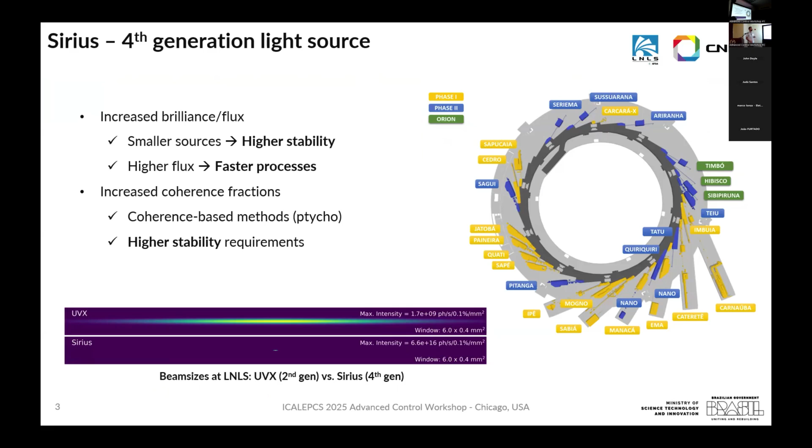So we need not only to provide a better beam, but also better beamline components. So we needed to improve the techniques we use to exploit all the possibilities that a fourth generation light source would enable. So we need to come up with high performance mechatronics. And this is a body of knowledge that has been constructed for almost 10 years by the community along with some partners. They are here in this event as well.

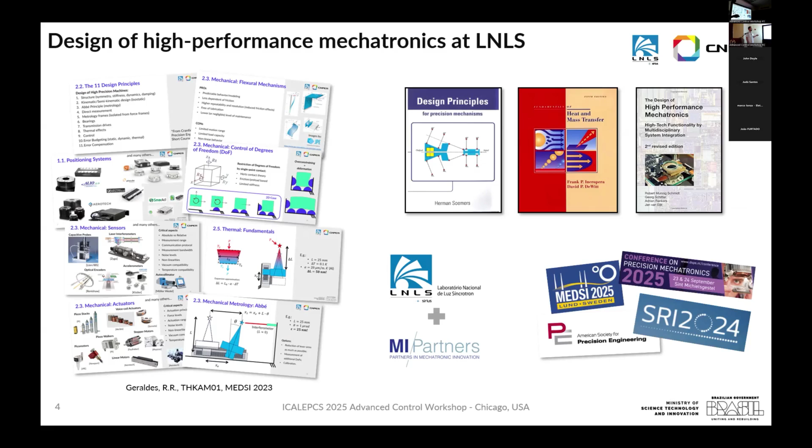And this is a very multidisciplinary task. It involves mechanical, electronics, thermal, and also control. And I'm here presenting only the control part. So we came up with a kind of workflow for designing the controllers. It starts already in the mechatronic design itself, which already takes into consideration making life easier for the control side.

So after we have a prototype, a proof of concept, or actually the final system, we do system identification to check the frequency response, to see if it matches the model, if it has any unmodeled aspects, strange resonances, if there's bad assembly that shows some artifacts in the frequency response. If we see this kind of stuff, we come back to the mechatronic design or even the assembly of the system.

If not, we go to design controllers, we implement them digitally, test the performance, and we test if the specifications are met. If not, we try to improve the controller, try different techniques, different tunings. And if it's not possible, we have to come back to the design. So it's basically a workflow to design the digital controllers for these mechatronic systems.

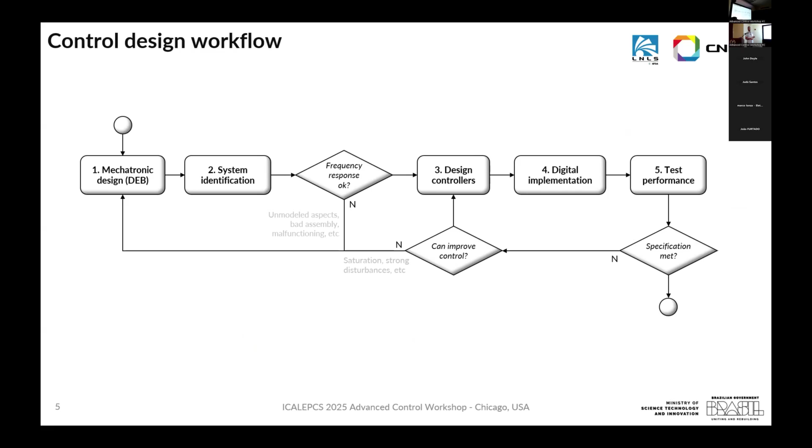And the first step, the mechatronic design, as I said, is a very multidisciplinary part. It involves establishing specifications, modeling disturbances, and trying to design the system considering everything together. We use lumped mass models and finite element methods to come up with the best model we can. And we use these models together with the models of the disturbances, vibrations, electronics noise, cryo-cooler vibrations, and we put everything together with a fixed control loop structure, which we try to optimize.

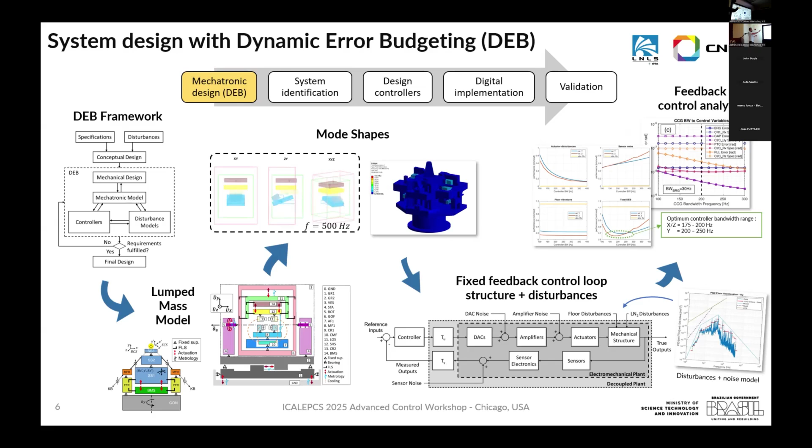Nowadays, we optimize mostly the bandwidth of the controller to see which would be the optimal bandwidth based on this modeling. Of course, we can't just extend the bandwidth forever because we have limited actuators and we would amplify noise. But this is the first step. We already take controls into consideration there.

So after we have a physical system, we do system identification. For this type of system, we are using a multisine excitation input. So a bunch of sinusoidal signals summed up, and we control the phase of each component with Schroeder phasing. It's a technique that reduces the crest factor of the signal, which is basically the ratio of the peak of the signal to the RMS. This is a way to minimize excitation of non-linearities and internal modes of the system; we want to come up with a very linear model here.

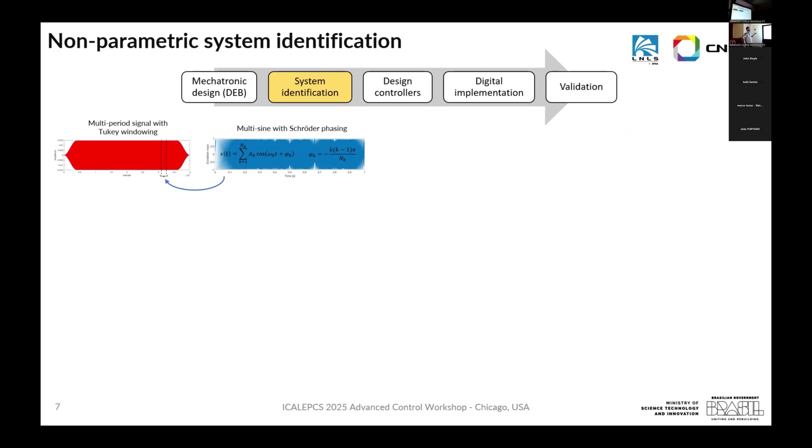Okay, so we take several periods of this multisine signal. We do a windowing at the start and at the end to, again, smooth the response of the system, trying to excite the less energetic modes and non-linearities as little as possible. And we implement this in a CompactRIO platform, which is the same one where we will implement the controller later.

We apply this excitation signal in each input, acquire all outputs simultaneously to get a MIMO frequency response. So we have a frequency response relating all inputs with all outputs. We do that for many operation points to check how the dynamics vary. For example, we see that for cryogenic and non-cryogenic operation of the system, these resonances move a little bit due to thermal expansion and such.

We also estimate the relative gain array, so we can be sure what the degree of decoupling is between these degrees of freedom. For this system, for example, we see a good decoupling up to 400 Hertz, which gives us confidence to go to a loop-at-a-time design, a decentralized control.

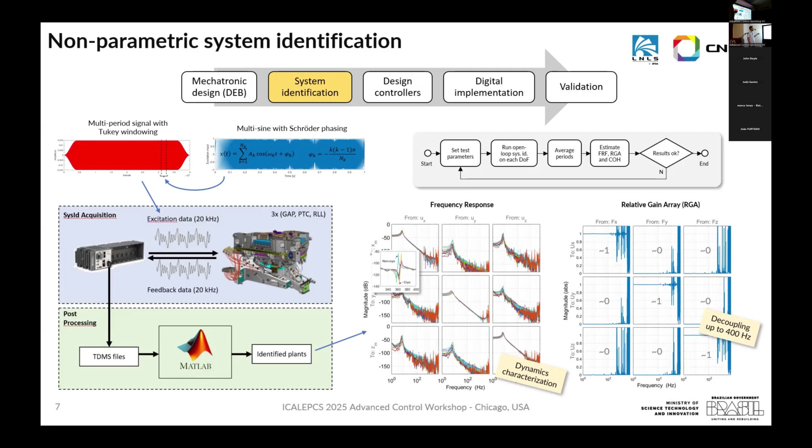And again, we validate this by iterating the test parameters here from the multisine excitation input. So okay, given a decoupled design, decoupled response, we are confident to work with a decentralized control. So nowadays we are working only with this, with SISO design. So when we do this system identification, we are already taking into account decoupling matrices. So we use decoupling matrices from sensors and actuators.

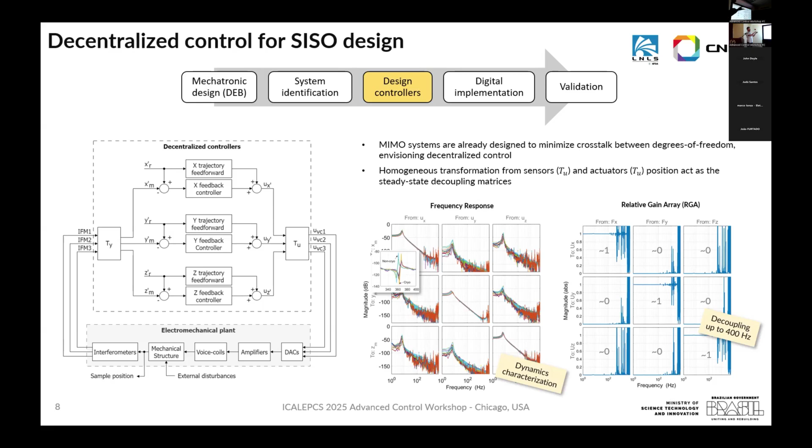They are basically homogeneous transformations from the position of the sensors and the actuators coordinate systems to the coordinate systems of interest, for example, X, Y, and Z. We want to control that. So we already have the decoupled design. And with this, we move on to design the SISO controllers.

So, well, we start with the loop gain definition, which is the transfer function of the combined controller, the plant, and the sensor dynamics. So it includes the phase of that. So we have this loop transfer function. From it, we can define also the closed loop transfer functions relating all inputs, the disturbances, the noises, the reference, to the signals of interest, which are the outputs, the error signal, the control effort.

And when we come up with all of this, we see that there are some trade-offs in the design. This is very classical for a control problem. So if you try to make the output track the reference well, you will not reject very well the noise. So we have a compromise there, and the solution is just to deal and to live with it by setting high gain at low frequencies and low gain at high frequencies.

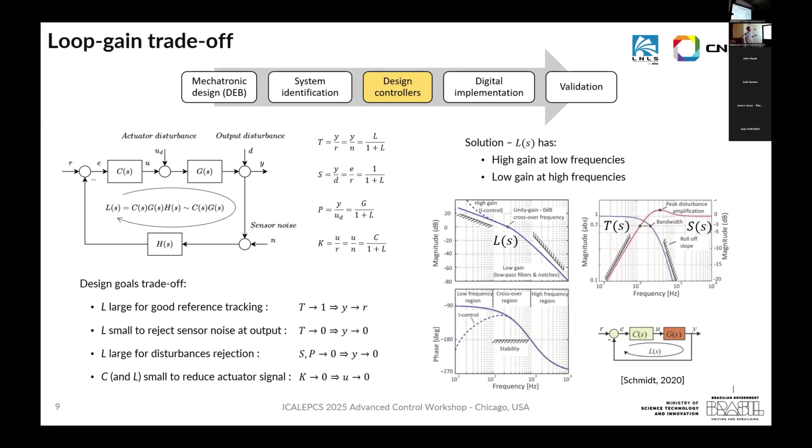So the transition of these two parts is where the loop gain crosses the unity gain, which we'll define here as the bandwidth of the system. And this is a very classical setup. And now what we want to do is to make the loop gain have the shape that we want. So we use the loop shaping method. For these systems, we have been using a fixed PID-like structure.

So it is composed by a proportional gain, one or two integrators, a lead compensator for phase margin, and some filters, so a low-pass filter to attenuate measurement noise, and also some high-frequency dynamics that are very outside of the bandwidth of interest, and some notch filters to deal with resonances that are bad for the margins.

And we also like to separate them in these second order blocks, so that when we discretize them, we provide a much higher numerical stability than if you discretize the entire transfer function at once. So we set some design specifications for the bandwidth. It comes generally from the first step during the design of the mechatronics that optimizes the bandwidth that we want to reach. It has been between 100 and 300 Hertz.

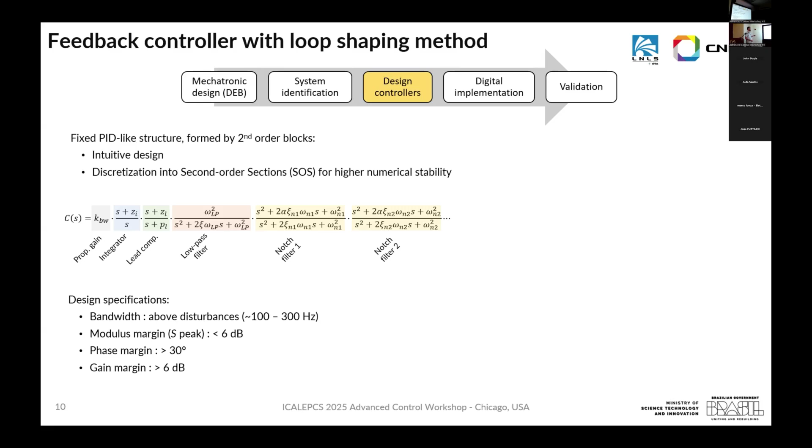We set a modulus margin of maximum 6 dB. The modulus margin is basically the peak of the sensitivity function, or how far you are from the critical point in the Nyquist plot. So this is a more convenient way to define robustness than gain margin and phase margin. It's kind of a combined margin there.

And to do this tuning, the loop shape tuning, we are doing it currently manually using a MATLAB tool called ShapeIt. It was developed by the Eindhoven University of Technology and some researchers there. And it's pretty similar to SISOTool, Control System Designer from MATLAB, but we like it a lot because it's very fast and it has a great advantage that it already exports the controller in these separate blocks. So I really recommend it. It's a free tool available online.

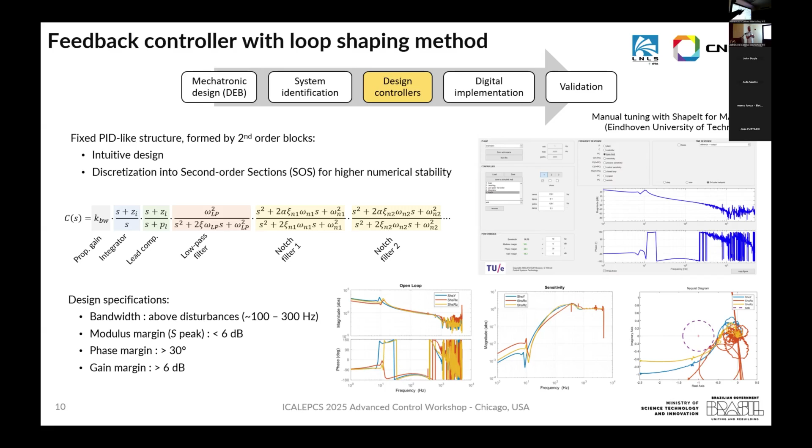And when we do this manual shaping, we are looking at the different transfer functions. So the open loop, the sensitivity, and the Nyquist plots, we can move between them with the selectors. And okay, so this is what we are doing now. We are envisioning using more advanced techniques like H infinity, H2. I know there's a talk about it, so it will be interesting to see later.

Okay, so feedback control can't do everything. So some systems need to follow a trajectory. And if you want to follow a trajectory very well, we would need to open the bandwidth of the controller too much, but this causes problems for the measurement noise. So we do a reference feedforward.

And when you do a reference feedforward, here you have it simplified. We have this closed loop transfer function, in which we see that if you approximate FG to 1, this transfer function goes to 1, and the output matches the reference, which is what we want. So to do this, we can use the model inversion technique.

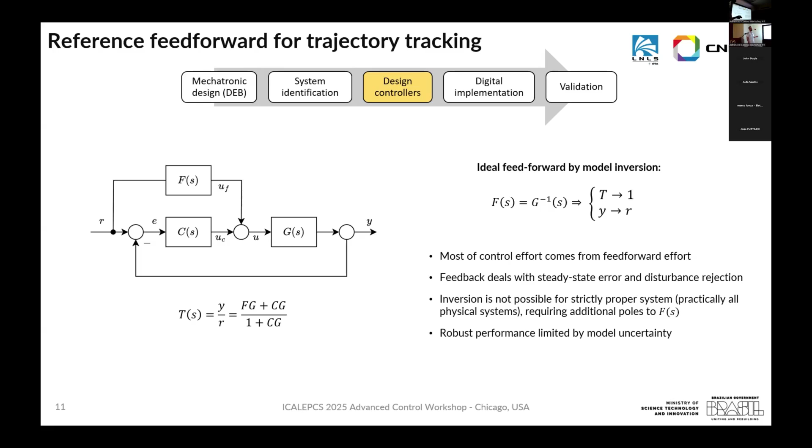So you just say that f is equal to the inverse of g. And of course, this is not practically possible, because if you invert the dynamics of a physical system, you have a non-causal system there. So it's never possible to do this inversion, but you can use it in smart ways to have some results.

So for example, for motions that require S-curves, so polynomial curves, we just provide all the derivative terms of the trajectory. We multiply them with gains. And we already provide a non-causal transfer function for this feed forward. For this, we need a parametric model. We usually fit a second order model with our data, and we can come up with Kp, Kv, and Ka related to the position, velocity, and acceleration terms.

Another technique we are exploring now is for periodic references. So we actually take the identified plant, invert the data we have to mount a lookup table. We embed this in the controller. And when we have these periodic references, for example, this almost square wave signal here, composed by many harmonics, we just provide the information about these harmonics, amplitude, frequency, and phase, for the trajectory generator and for the feed forward.

The feed forward will apply a gain and a phase for each of these components to generate a feed forward effort. It has worked well when the dynamics doesn't change much. So we have a work in progress to make an online estimation of this gain phase response as well.

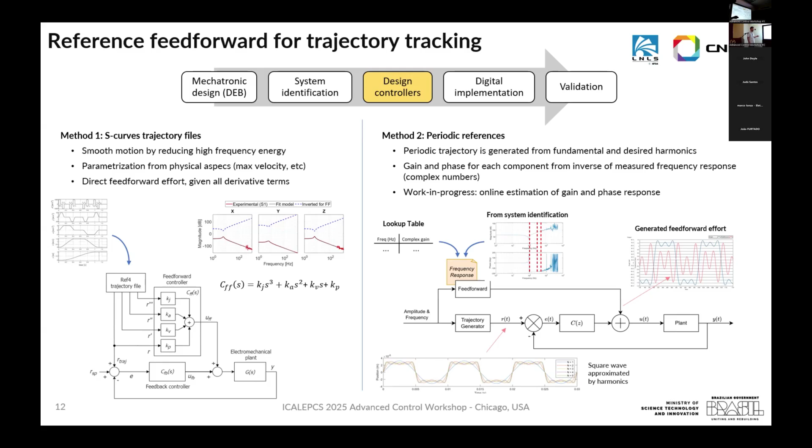And the digital implementation: after we have come up with these controllers, we implement them in a CompactRIO platform, which has a CPU and an FPGA core. Of course, the FPGA is dedicated for the control loop. The CPU is more for high-level stuff like file handling, EPICS, and stuff. And the implementation here has been at 20 kilohertz sample frequency. We discretize each block of the PID controller separately to improve numerical stability. Using Tustin discretization, we always use pre-warping so that, for example, the center frequency of the notch filters doesn't move.

The implementation in the FPGA is done in double precision floating point, 64 bits, so it makes the life of the developer easier, so we don't have to worry too much about the ranges of the fixed point implementation. And we need double precision for the dynamic range. So for example, we have stages that move millimeters with a precision of nanometers. So we need that kind of resolution.

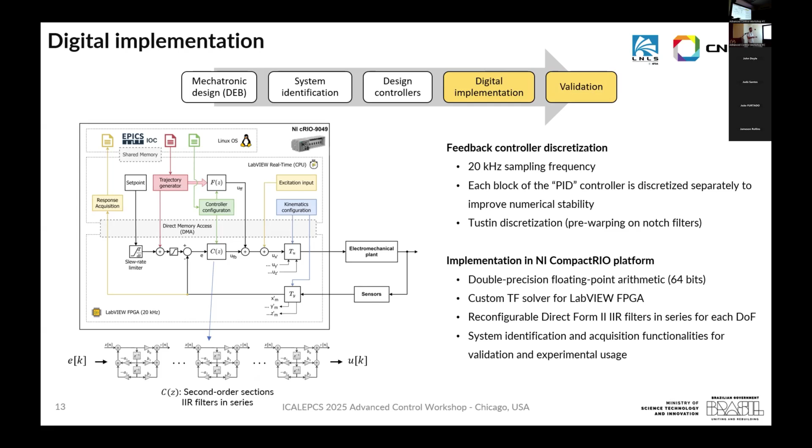We have a custom transfer function solver developed. We have a work we'll present tomorrow here about it, which consists of a reconfigurable chain of infinite impulse response filters in series that we can reconfigure online, and have a lot of these chains, so we can control many degrees of freedom. Everything is done in LabVIEW. We program this in LabVIEW. And of course, the system identification and acquisition functionalities work along with it for validation tests and for experimental usage as well. So just some applications where we have been using this framework.

So the double crystal monochromator, which selects the energy of the beam for the experiment by setting the angle of two crystals. So we have to set the angle of these two crystals with a goniometer, a brushless DC motor, and also control the distance, roll, and pitch between these crystals. And so we have achieved a steady stability in these crystals better than 10 nanoradians. Actually for the gap, which is the distance between the two crystals, we achieved better than 1 nanometer stability.

We have been able also to do fast scans. So we have an example here of a 10 hertz scan. One of our beamlines is using 5 hertz scans nowadays. So they are able to measure an absorption spectrum at 5 hertz. As we measure in both directions, we have like 10 spectra per second.

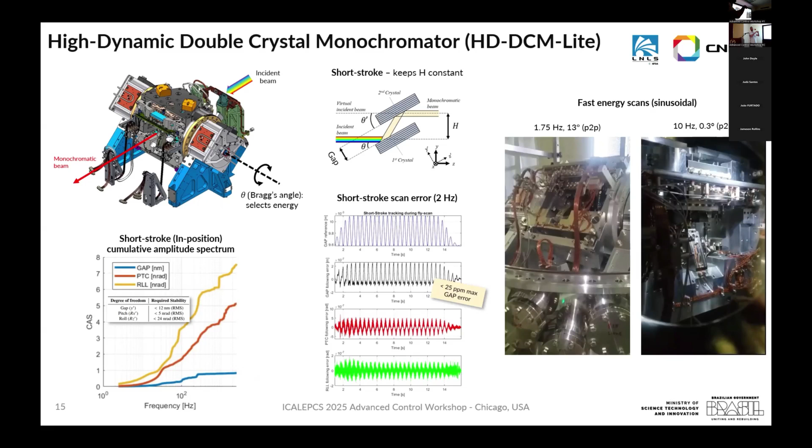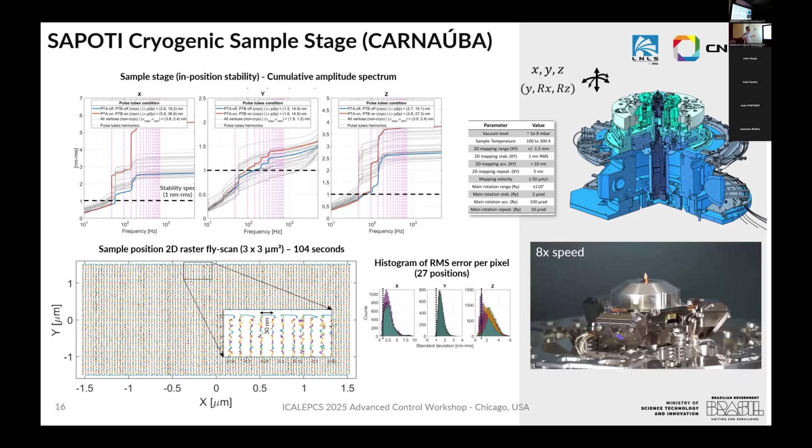This is another application. It's a cryogenic sample stage, Sapoti, for the Carnaúba beamline, which is a stage to position the sample. It has a 3 millimeter sphere working volume, and our stability spec is 1 nanometer. We are still working to reach it, but we already have better than 4 nanometers for non-cryogenic operation. We can also do fast fly scan operation.

And finally, an application that is a work in progress. It's a quarter wave plate for circular dichroism experiments. So basically, we have a crystal here where we want to polarize circularly and linearly by changing the angle of the crystal. And in one of the operation modes, we need to do that in a lock-in operation, so it will change the polarization while measuring with a lock-in amplifier. And the goal is to work with 100 hertz frequency, and we have seen good results. This is where we are using this method of feed forward.